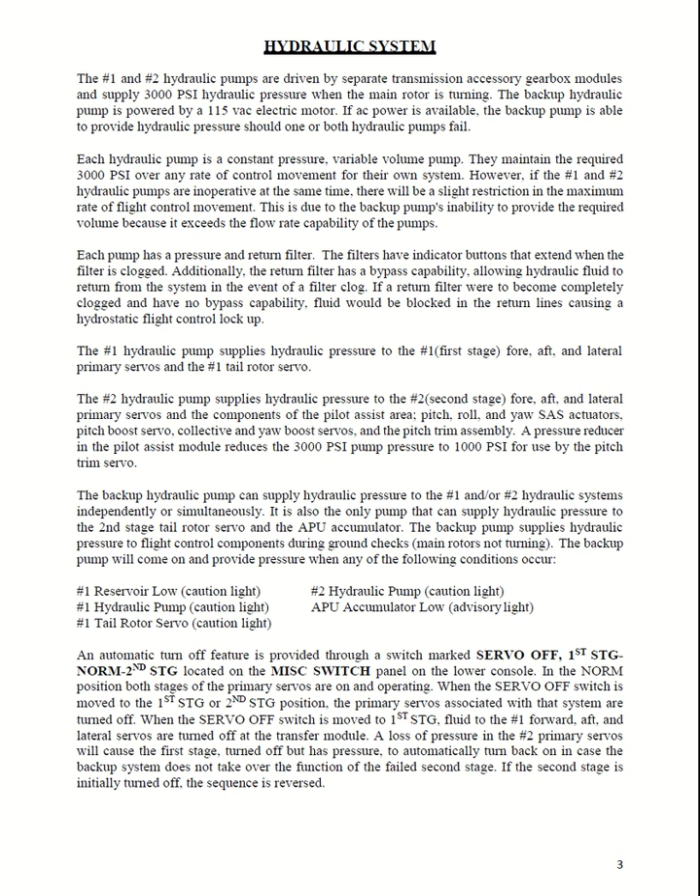A loss of pressure in the number 2 primary servos will cause the first stage, turned off but has pressure, to automatically turn back on in case the backup system does not take over the function of the failed second stage. If the second stage is initially turned off, the sequence is reversed.

Hydraulic logic. Hydraulic logic uses leak detection isolation, also known as LDI, to protect the flight control hydraulic system by preventing further loss of hydraulic fluid in case of a leak. The hydraulic logic uses pressure switches and fluid level sensors for monitoring pump hydraulic fluid level and pump pressure for primary and tail rotor servos, as well as pilot assist servos.

When a pump module reservoir fluid level switch detects a fluid loss, the logic module follows the sequence detailed in the figures on pages 8 and 9 of the Flightline supplement to isolate the leak. To accomplish this, the logic module operates the required shutoff valves to isolate the leak and turns on the backup pump when required.

In the cockpit, the RSVR, or reservoir low caution, for that system appears. Backup pump and shutoff valves operation is automatic through the logic module.

If after the isolation sequence takes place the leak continues, the leakage is probably in the first or second stage primary servos, and the servo off switch must be moved to the first stage or second stage position by the pilot.

Logic modules. Two logic modules, one in the left relay panel and the other one is in the right relay panel, are used for the control operation of the hydraulic systems. The logic modules continually monitor the operation of the hydraulic systems by inputs received from the pressure switches, fluid level switches on the pump modules, and inputs received from the control switches in the hydraulic system.

The outputs of the logic modules will either activate cautions and advisories notifying the pilot of a failure and or turn off one or more of the valves due to system malfunction.

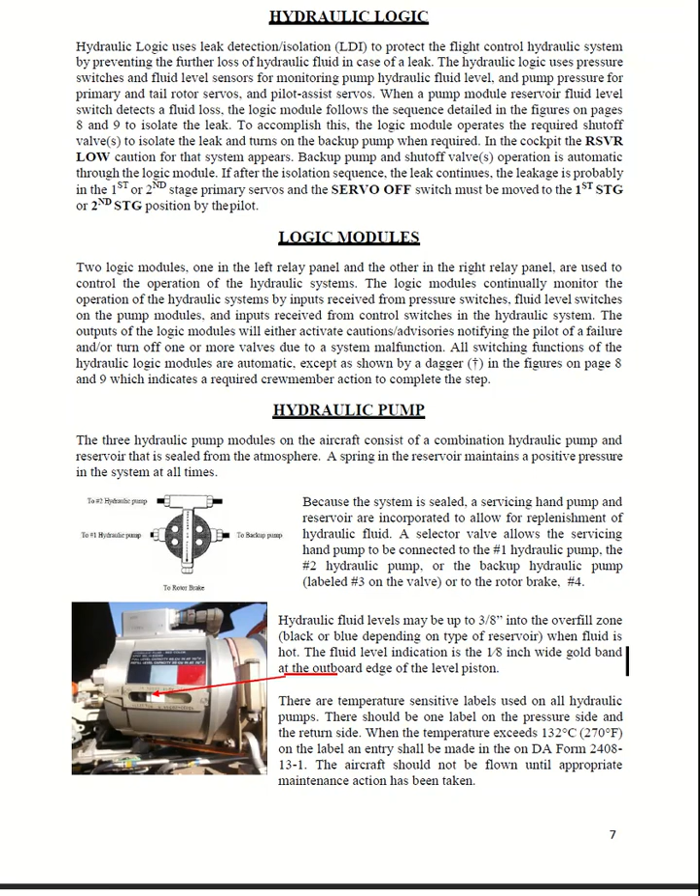When the temperature exceeds 132 degrees Celsius or 270 degrees Fahrenheit on the label, an entry should be made onto the DA Form 2408 13-1. The aircraft should not be flown until appropriate maintenance action has been taken.